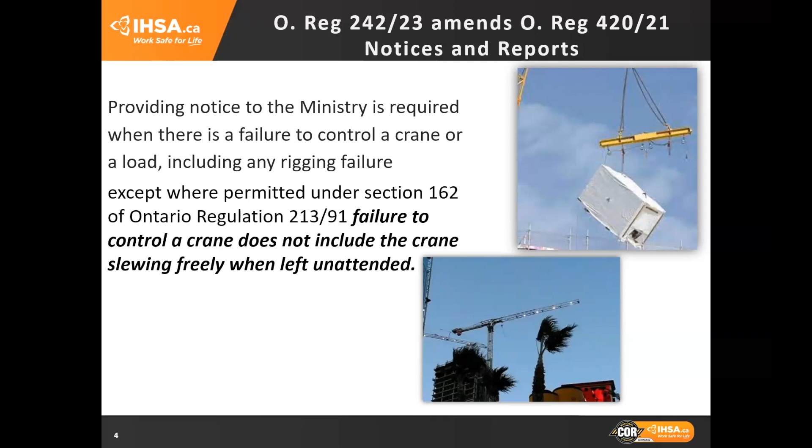Next, we'll cover some of the definitions that have been added to the regulation. A definition is being added for self-erecting tower cranes. Self-erecting tower crane means a tower crane that is capable of being erected without the use of ancillary equipment. Parts of sections 156, 157, and 158 may apply to a self-erecting tower crane, depending on the configuration of the project. These sections will be discussed further in the presentation.

In subsection 1.1, the reference to the regulation for non-destructive testing certification has been updated to allow for rolling reference of the qualifications for the certification standard of the people conducting non-destructive testing.

Section 106 has added 2.1, and it covers signalers and operator interaction. It has been revised to allow communication through other means when using visual signaling cannot be achieved. One example is a blind lift by a crane, where the operator relies on a signaler or a swamper for direction. The signaler can direct the crane operator using a radio or other means of clear, direct communication when the crane operator cannot see the load or the signaler.

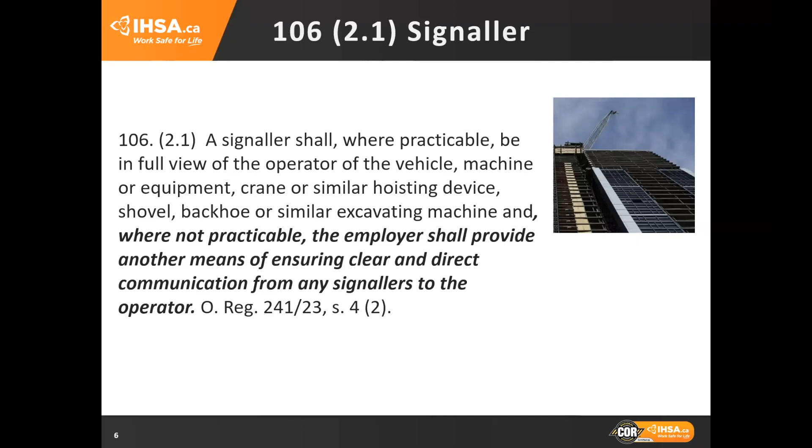Here is a new section that identifies the updated CSA standards referenced in the crane, hoisting, and rigging sections of the regulation. Where the CSA standard Z248-17 is cited, it means CSA standard Z248-17, code for tower cranes. And Z150-16 means the CSA standard Z150-16, safety code for mobile cranes.

And the CSA standard Z150.3-17 means the CSA standard Z150.3-17, safety code on articulating boom cranes.

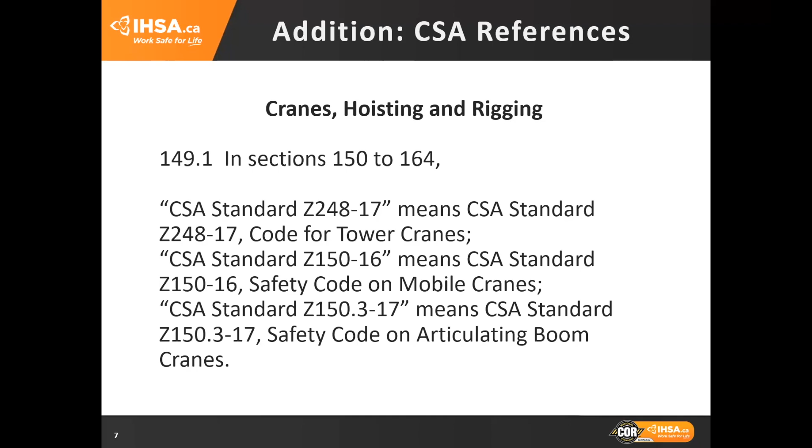Section 150 states the requirements that must be fulfilled to be authorized to operate various hoisting equipment. This section covers the authorization, the training requirements, and the operator requirement for carrying proof of training while operating a crane or other hoisting device.

In clauses A and B of subsection 150 sub 1, the text refers to the operation of mobile cranes. Therefore, the word mobile has been added immediately before cranes or similar hoisting device to provide clarification on the type of crane that requires compliance with the Building Opportunities in the Skilled Trades Act, or BOSTA.

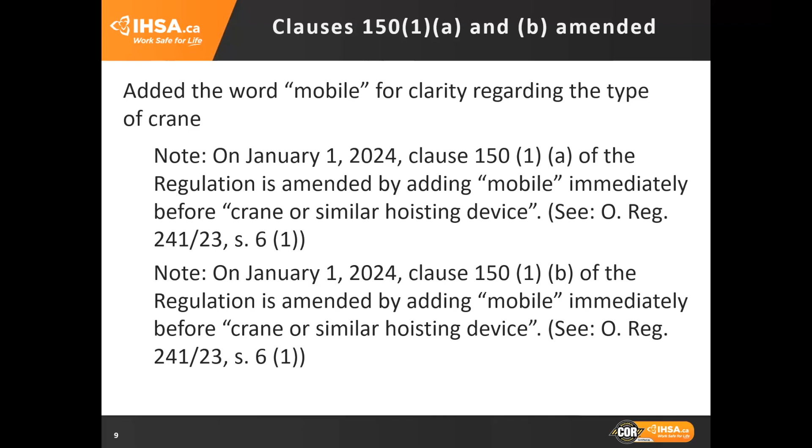Subsection 150 (1.1) has been revoked from the regulation. This requirement for certification does not apply to the operation of excavating equipment. Subsection 150(1) is for the operation of mobile cranes with a capacity over 8 tons and tower cranes.

Excavating equipment may be used to hoist material if the manufacturer allows it. The operators are to comply with subsection 150 sub 2 and sub 3. Excavating equipment used to hoist material is one example of the term other hoisting device.

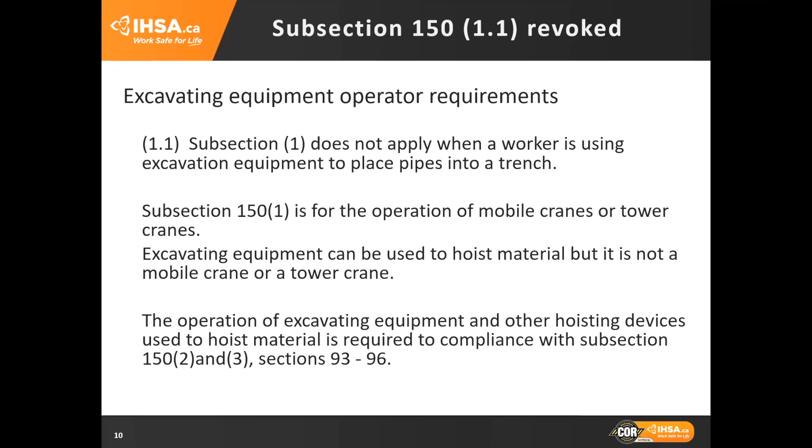The operators of a crane other than the one described in subsection 150 sub 1, such as overhead cranes or gantry cranes and derricks, are to comply with subsection 150 sub 2 for the operation. Same goes for other hoisting devices. Operators of other hoisting devices are also to comply with subsection 150 sub 2.

So no worker shall operate a crane or other hoisting device other than the ones described in subsection 1 unless the worker has been trained in the safe operation of the crane or other hoisting device, or a worker is being instructed in the operation of the crane or other hoisting device and is accompanied by a person who meets the requirements of clause A.

The requirement for written proof of training has been removed from subsection 150 sub 2 and added to subsection 150 sub 3.

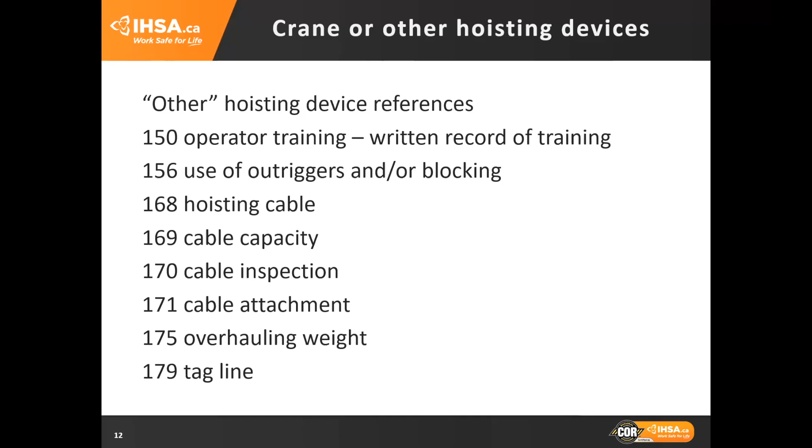The term other hoisting device has been added to the regulation in various sections. This is to cover other equipment that is capable of hoisting material, such as excavators and lift trucks. We will go through the sections as they apply when we get to them in the presentation.

So here's a before and after when it comes to subsection 150 sub 2. The word similar has been changed to other in the newest version.

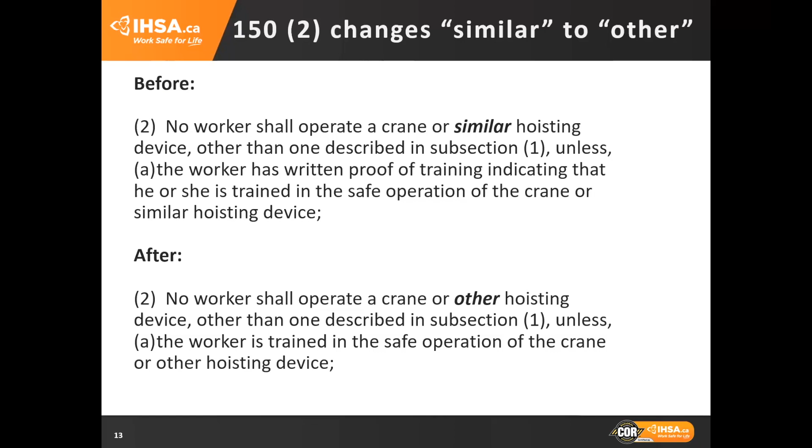In subsection 150 sub 3, his or her changes to workers. Subsection 3 applies to both subsection 1 and 2. A worker shall carry the worker's written proof of training while operating a crane or other hoisting device.

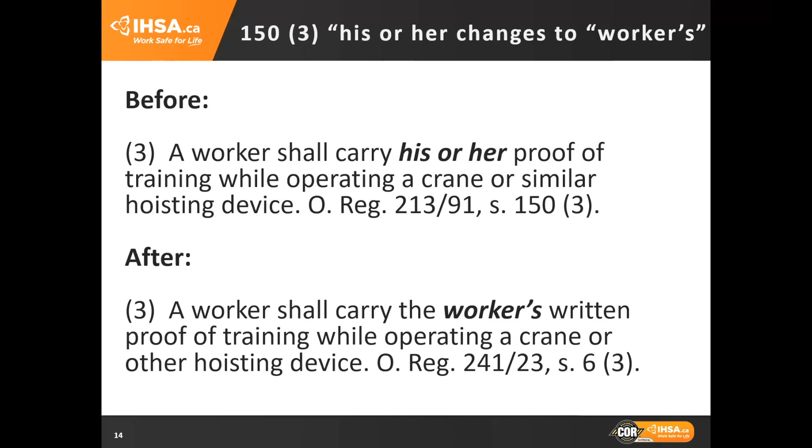Subjecting a crane to a load greater than its rated load carrying capacity was prohibited even if it was required by the manufacturer for testing. Now, load tests required by the manufacturer are allowed to be conducted. The words other than during load tests required by a manufacturer has been added to subsection 151.

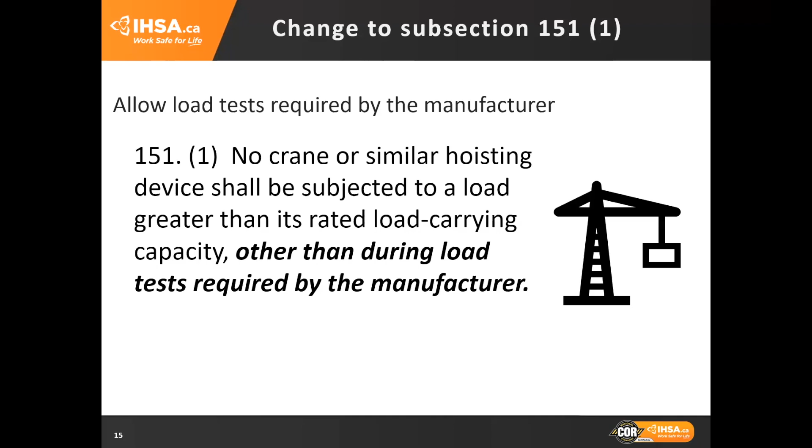The CSA standard referenced in 151 sub 2 are updated for determining the crane's load carrying capacity. Subsection 151 sub 2 requires the manufacturer of a crane or an engineer to determine the rated load carrying capacity of a crane in accordance with, for mobile cranes, the CSA standard Z150-16, safety code for mobile cranes.

Or CSA standard Z150.3-17, safety code for articulating boom cranes. And for tower cranes, it's CSA standard Z248-17, code for tower cranes.

Previously, this section stated that every crane or similar hoisting device shall have affixed to it a load rating plate. This requirement was not practical for cranes with dozens of possible configurations. So 151 sub 3 was amended to reference load rating charts or charts and not just a plate.

The operator must be able to read the load rating charts while at the controls of the crane to determine the maximum load that can be lifted for each configuration.

To achieve this, subsection 151 sub 3 requires every crane to have affixed to it the load rating chart or a plate with the model and serial number or other traceable method that can be used in conjunction with the crane-specific load charts that the operator can read while at the controls of the crane while it's in use.

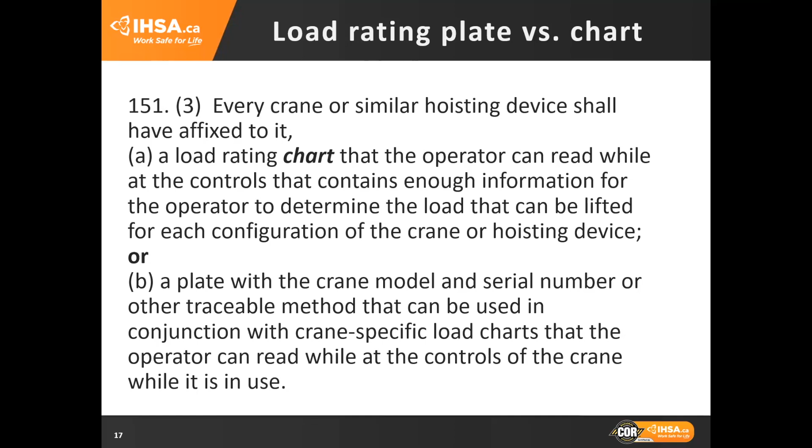Here are some examples. On the top right, it's a load chart affixed to a boom truck. In the lower left, you'll see an example of an identification plate, and beside that would be a binder matching the identification plate for the crane.

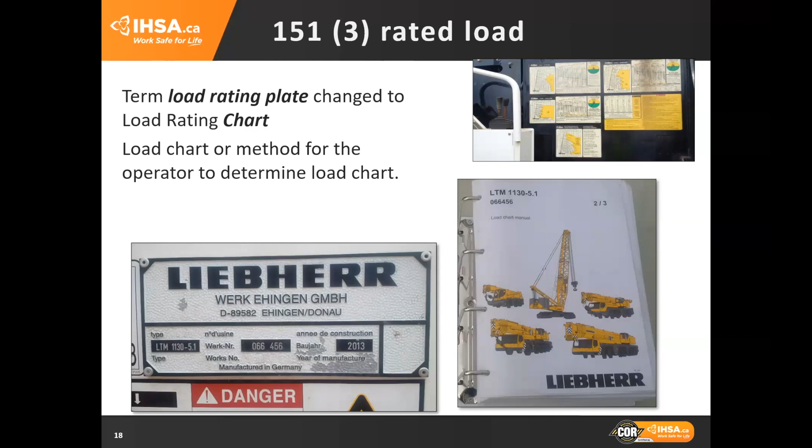This is new for luffing cranes. As of January 1st, 2025, a luffing boom tower crane will be required to have a boom angle indicator that the operator can read while at the controls.

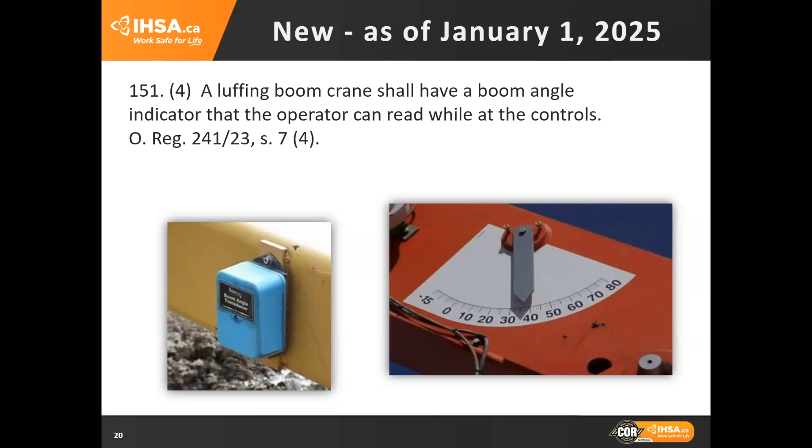Section 152 covers crane logs. You can get them at IHSA.

Here are the changes to 152 sub 1. Basically, the term permanent record is now called owner's crane log, and the rest of this section remains the same. The requirement to keep records of all inspections, tests, repairs, modifications, and maintenance of the crane or similar hoist device remains the same. Just the term permanent record is now called owner's crane log.

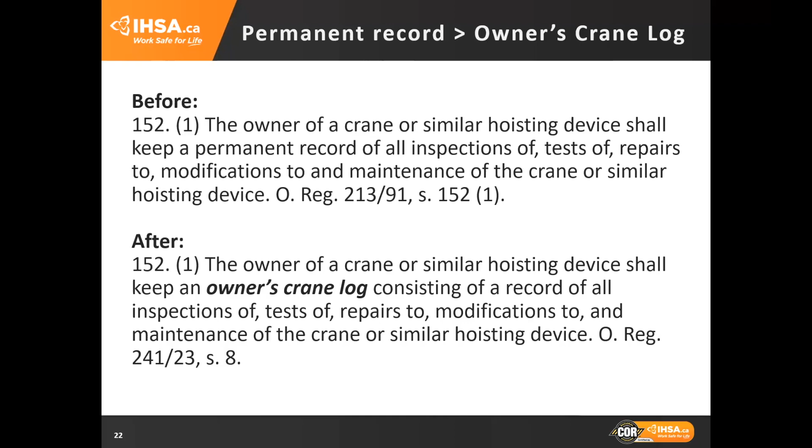This is a new requirement: if there are no records or insufficient records required in subsection 1, a crane owner's log consisting of all records of inspections, tests, repairs, modifications, and maintenance of the crane must be started. If that's not available, an annual inspection must be completed prior to the crane being put into service at the project. Once the annual inspection is done, this is considered the starting point for the owner's crane log. For example, if the crane was bought secondhand or at an auction and there are no maintenance records, an annual inspection would have to be conducted.

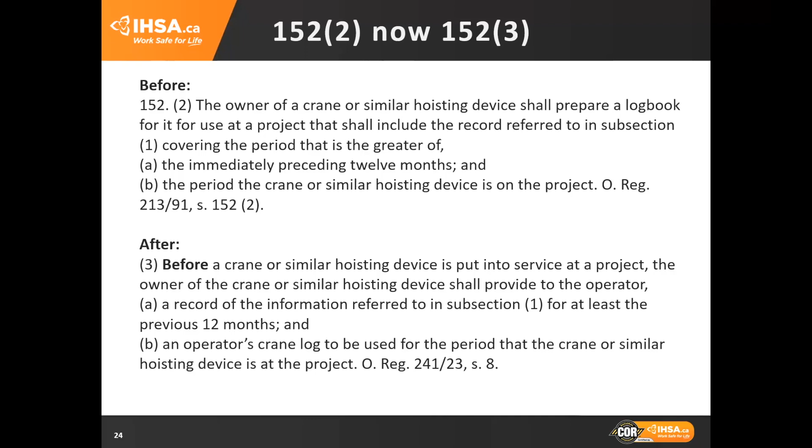The difference between subsection 152 sub 2 and 152 sub 3 is basically the numbering. It's the same requirements. The only change is that the owner must provide the operator with the crane log prior to the crane being used at the project, so the operator needs to have the crane log before using the crane.

152 sub 4 has been updated. The logbook is to be kept up to date with a record of all inspections, tests, repairs, modifications, and maintenance of the crane while it's at the project. So it must be kept up to date as the crane is being used.

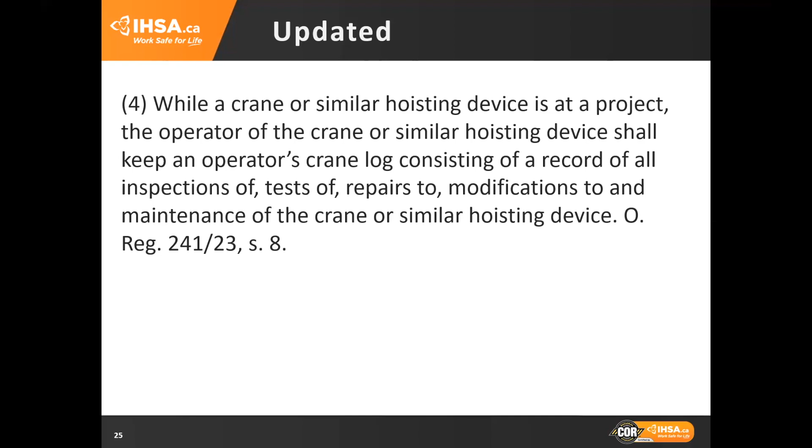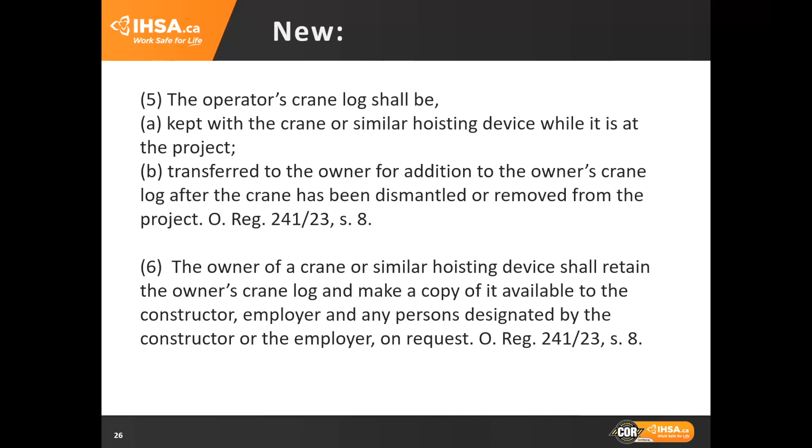It's another new requirement. Subsections 5 and 6 are both new. The owner is to add the information to the owner's crane log after the crane has been dismantled or removed from the project. The owner of a crane or similar hoisting device shall retain the owner's crane log and make a copy available to the constructor, employer, and any person designated by the constructor or employer upon request.

Personnel lifting. The amendments mirror the requirements of attachment methods described in CSA Standard Z150 for mobile cranes. The wording makes it clear that this section includes work platforms that are pinned to the boom.

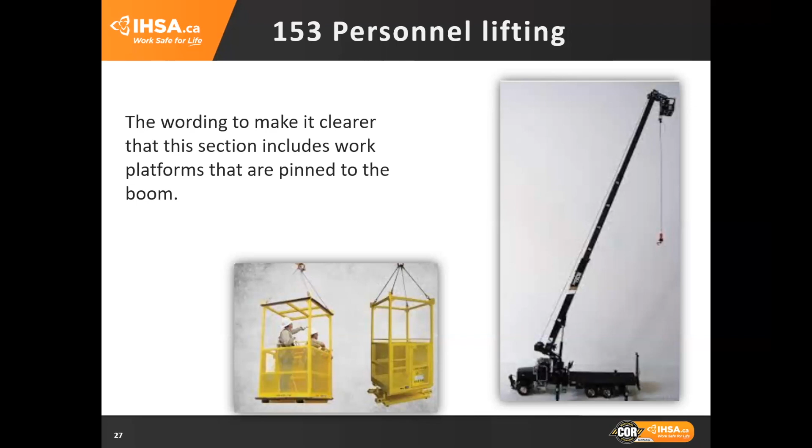This is an example of a pinned platform. Clause 153 2B III clarifies the secondary means of support for a suspended platform. A crane may be used to raise, support, or lower a worker only if the platform the worker is on is equipped with a secondary means of suspension or support that is secured above the hook and does not impede the hoist line. The example here is also from Z150 of the CSA standard.

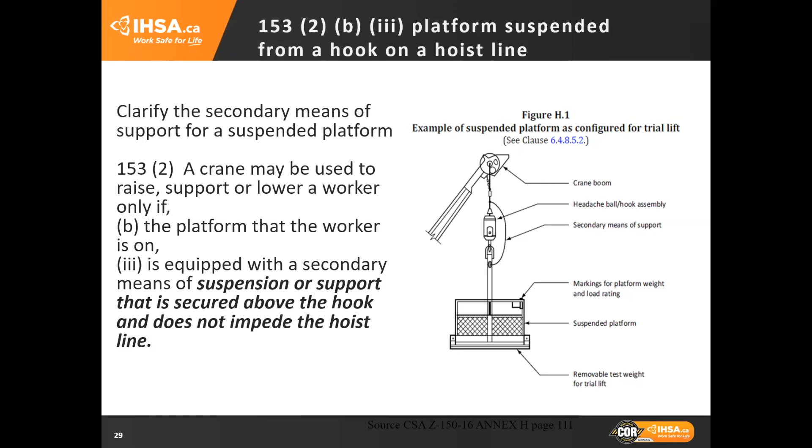Words have been added here to clarify the availability of the load chart to a worker at the controls, or otherwise available to an operator at the controls of the crane while it's in use, similar to the requirements in section 151 for a load chart or rating chart.

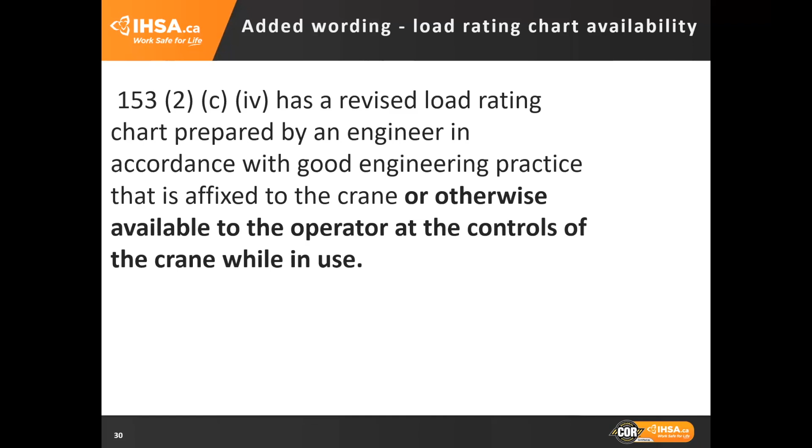Subsection 153 sub 9 has been amended by removing the word visually. A competent worker shall inspect a crane and rigging, not limited to the visual only. Other inspection instructions may apply depending on the application.

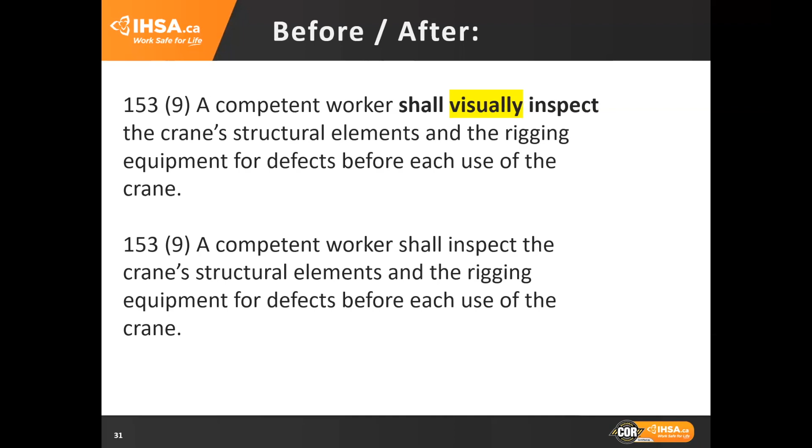153.11 has been modified by removing the requirement to only call by telephone. This allows for other methods of notification.

In subsection 154 sub 1, the terms climbed and erected have been added. The term climbing or climbed is as defined: climbing is a process whereby an entire crane is raised on or within a structure that is under construction as the height of the structure increases. So section 154 requires a crane or similar hoisting device to be set up, assembled, climbed, erected, extended, and dismantled only by a competent worker.

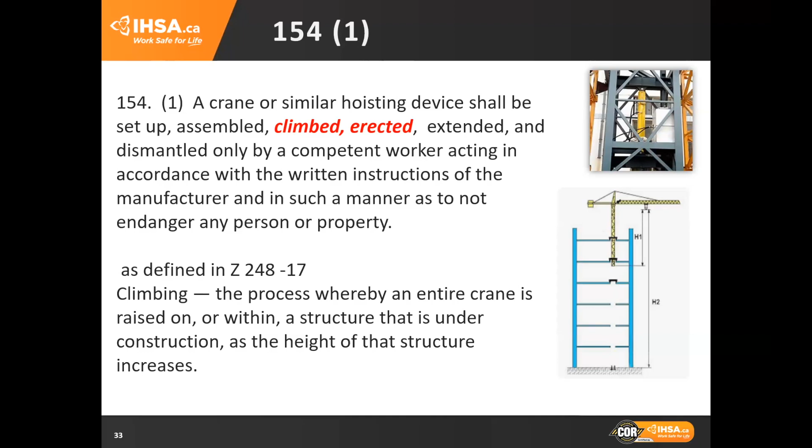There's a new subsection added to 154. This requires every portable or removable counterweight, test block, and ballast used on a crane to be accurately weighed and have their weight clearly marked on them.

There's a new clause for 156. An outrigger or stabilizing device used on a crane or other hoisting device shall be set up only after the ground-bearing pressure has been considered by the operator. This is to ensure that the crane is set up on ground that can support the crane and the maximum load it can carry during load handling activities. The manufacturer's operating instructions and specifications for the crane should provide information about the pressures exerted by the crane. Previously excavated soil and other voids may affect the stability of a crane.

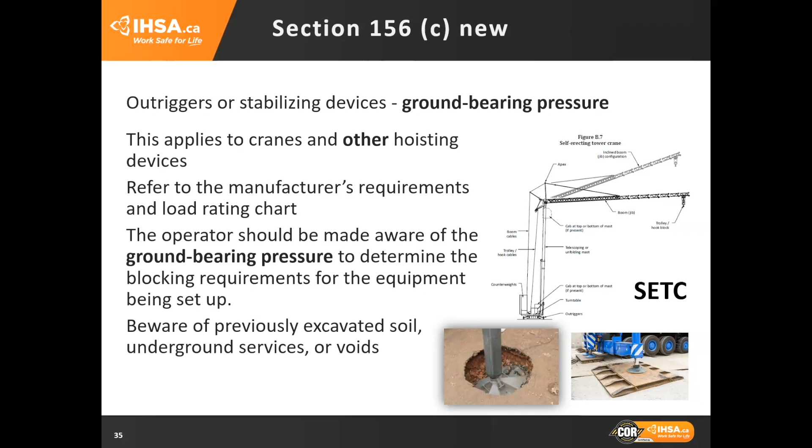Turn it over to you, Saeed, for the next part of the engineering presentation.

Yes, so section 157 spells out the requirement for installation and design requirement and report. This section talks about proper bearing capacity and reshoring and bracing requirement for the tower crane and all the required paperwork.

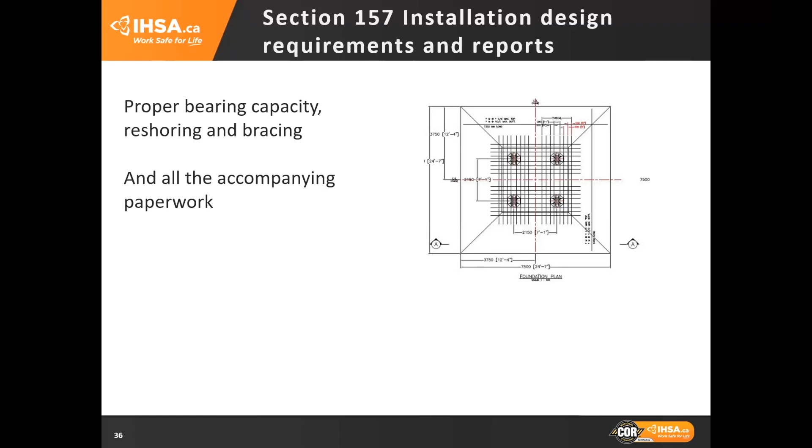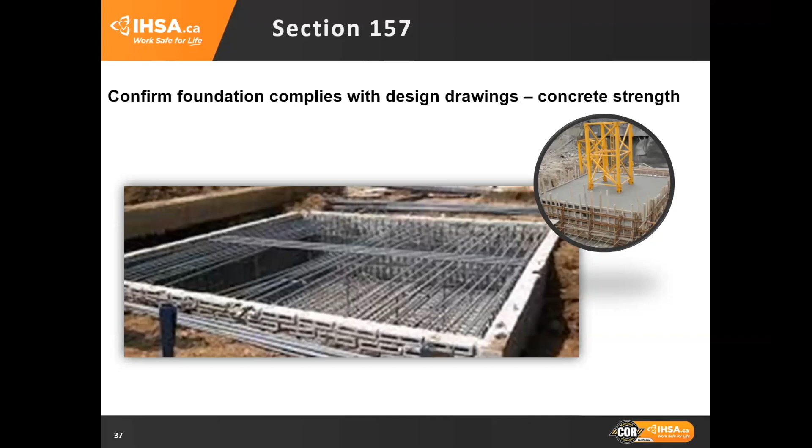So basically the engineer's role is to confirm the bearing capacity meets the design requirement of the foundation, and also ensures that the rebar arrangement numbers and sizes are within the design criteria. And after the concrete is poured, ensure the concrete strength meets the required design.

So a tower crane, other than a tower crane mounted on a traveling base using a traveling undercarriage or a self-erecting tower crane that does not require foundation, shall be erected at a project in accordance with this section.

As I said previously, the foundation, shoring and bracing that supports the tower crane or ties shall be designed by an engineer, and constructed, installed and dismantled in accordance with the design drawing.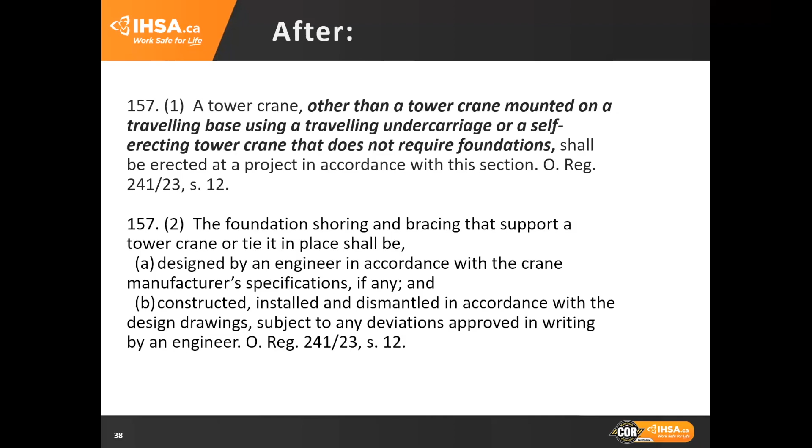The engineer who prepares the foundation design drawing shall consider the ground bearing pressure and capacity in preparation of the design, and where a building or structure is supporting a tower crane and the tower crane is attached to a structure, the engineer of record or another engineer should review the forces exerted by the tower crane on the building and ensure that the structural integrity of the building or structure is maintained.

So an engineer shall sign the design drawing for the foundation, shoring and bracing after they approved it, and the constructor shall keep all that paperwork and stamped drawings at the project for shoring, bracing, and foundation.

Also, an engineer shall inspect the foundation supporting the tower crane before the concrete is poured and prepare a written report confirming the foundation and support surface complies with the foundation design drawing, subject to any deviation from the design being approved in writing.

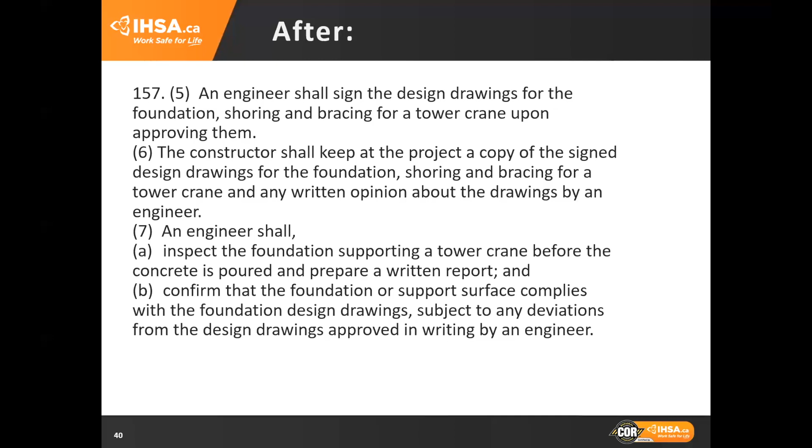The written report shall be kept at the project, and the crane shall not be erected until the concrete foundation reaches the strength specified by design. The shoring and bracing that supports the tower crane must be inspected by an engineer after shoring and bracing or ties have been installed and before the crane is put into service for the first time.

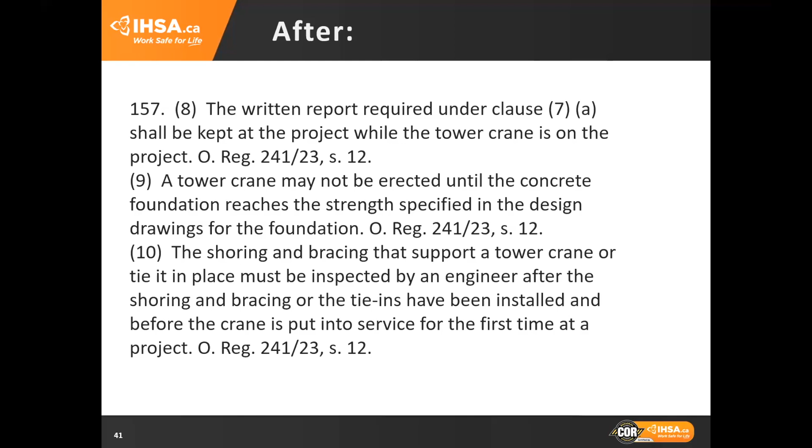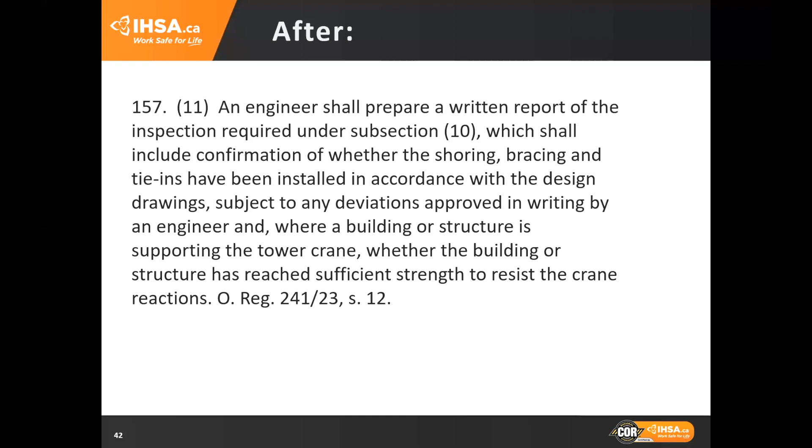So an engineer shall prepare a written report of the inspection required under subsection 10, including confirmation that the shoring and bracing and ties have been installed in accordance with the design drawing, and where a building structure is supporting the tower crane, whether the building or structure has reached sufficient strength to resist the crane reactions.

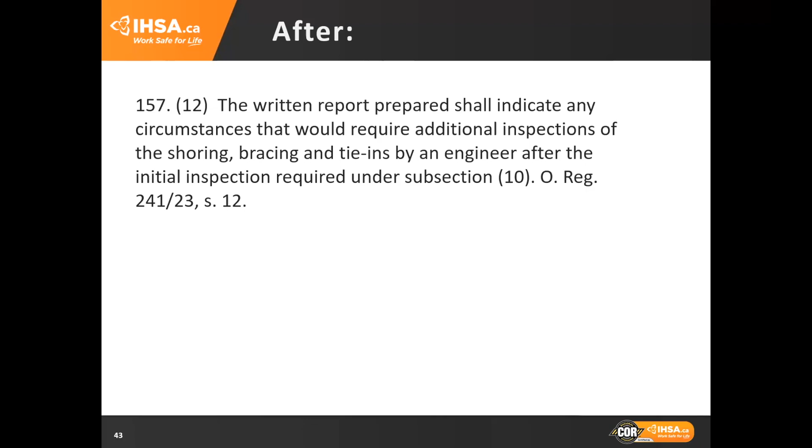The written report prepared shall indicate any circumstances that would require additional inspection of shoring, bracing, and tie-ins by an engineer after the initial inspection. So after the initial inspection required under subsection 10, the shoring and bracing components and tie-ins installed for climbing operation shall be inspected by a competent person, unless otherwise specified by the engineer in the written report, before and after each climbing operation to ensure the shoring and bracing components and tie-ins are installed in accordance with the design drawing.

And weekly after each climbing operation, to ensure that all installed shoring and bracing and ties are in place.

Each major component used for shoring the tower crane shall be clearly marked, stating that the component shall not be removed or repositioned unless authorized by an engineer.

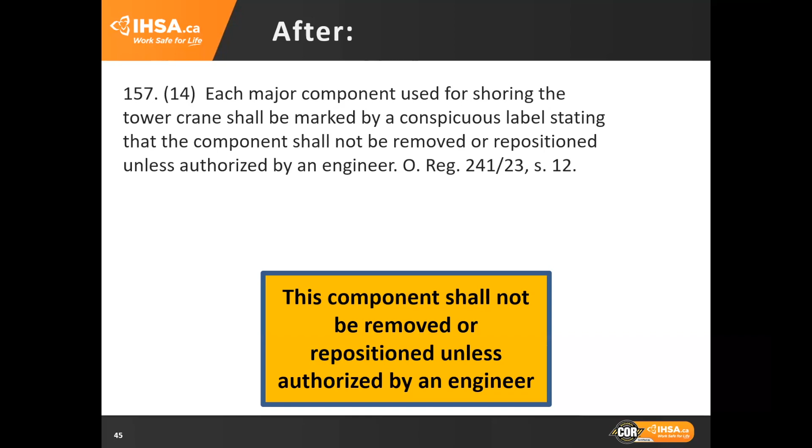Here's a sample of a label that could be used at the project to mark the components that need to be maintained in place unless authorized by an engineer.

These are three new requirements, section 157.1, 2, and 3, that talk about the requirement for the crane being installed in a plumb condition, and also requirements from CSA Z248, clauses 5.1, 5.8, and 5.9, and also the new requirement for the design that comes into effect in 2025.

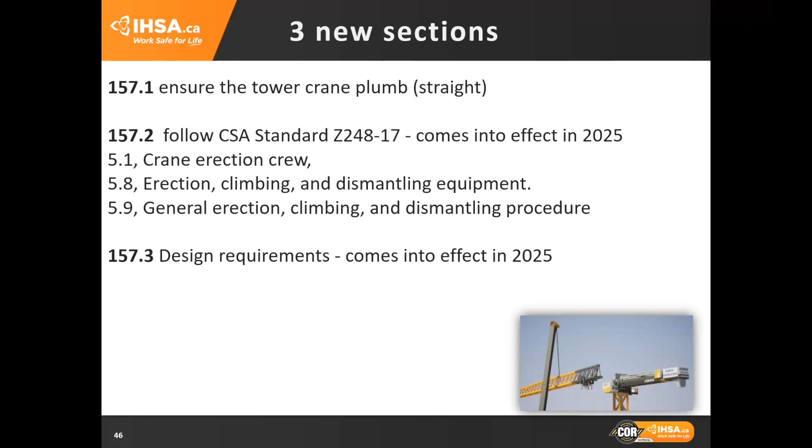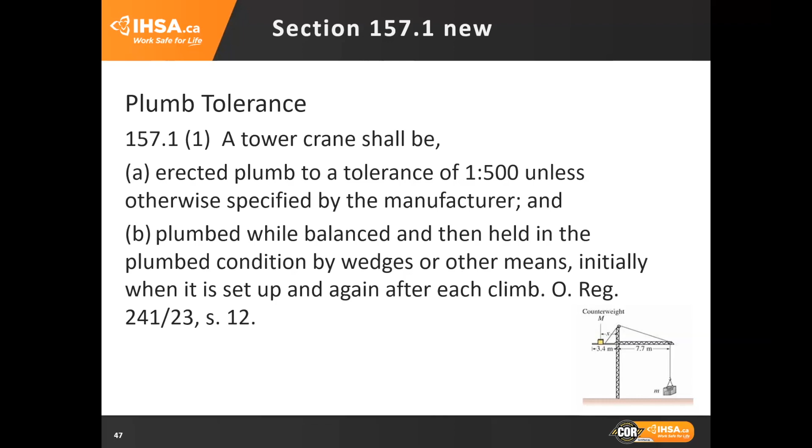So the plumb tolerance required by regulation is 1 to 500, which basically means in 500 vertical, only 1 horizontal. The tower crane should be installed in a straight and plumb condition and kept that way during operation.

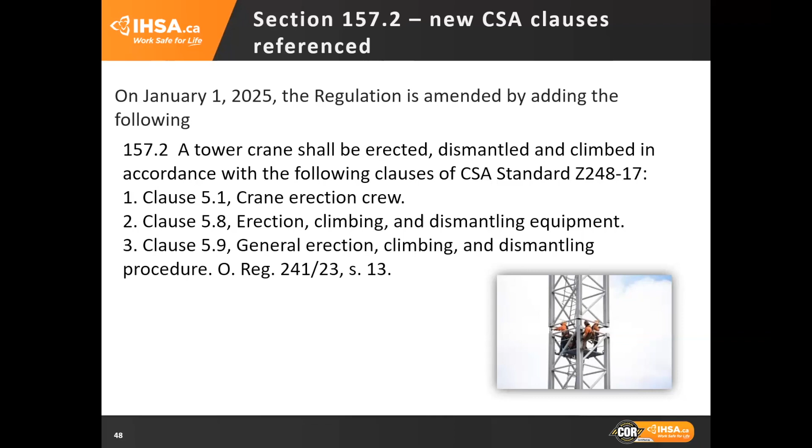On January 2025, the following will be added to the regulation. A tower crane shall be erected, dismantled, and climbed in accordance with the following clauses of CSA Z248-17: clause 5.1 talks about crane erection crew, clause 5.8 covers erection, climbing, and dismantling equipment.

And clause 5.9, general erection, climbing, and dismantling procedure. The new design requirement will kick in January 2025, and basically requires any crane manufactured on or after that date to be in compliance with clause 4.1 to 4.25 of CSA Z248-17 or European Standard EN 14439 2006 plus A2 2009. In addition, they should comply with the Electrical Safety Authority Specification 009 R0, electrical safety for tower cranes.

The control systems shall be in compliance with clause 4.21 of CSA Z248-17. If a tower crane manufactured before that date does not meet these standards or equivalent, the standard that those tower cranes are designed to should be reviewed by an engineer, and that engineer should determine whether or not that crane is in compliance with the standards listed in the table.

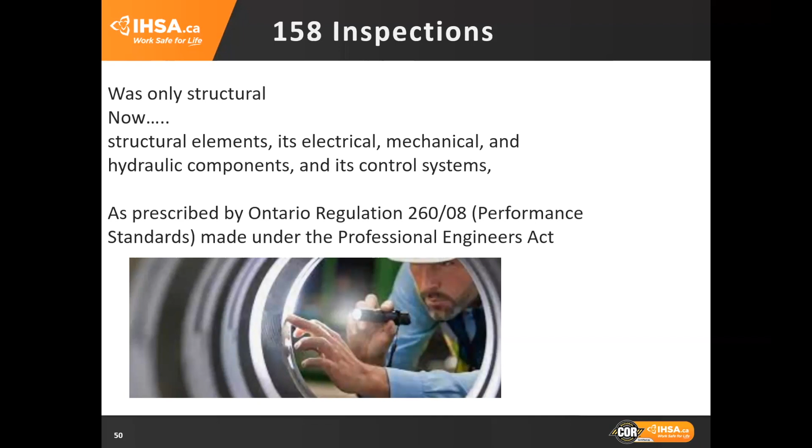Inspection for the tower crane used to be only for structural components. Now the regulation requires, in addition to structural components, its electrical, mechanical, and hydraulic components and control system to be inspected as per Ontario Regulation 260-08, which is the performance standard made under the Professional Engineers Act. This section spells out the requirement for the inspection to be done, and I'll talk about them.

Can you go to next slide?

Section 158.1 requires an engineer to ensure that a tower crane's structural elements, electrical, mechanical, and hydraulic components, and its control system are inspected in accordance with the performance standard under the PO, and that any defects identified are addressed, at the following times.

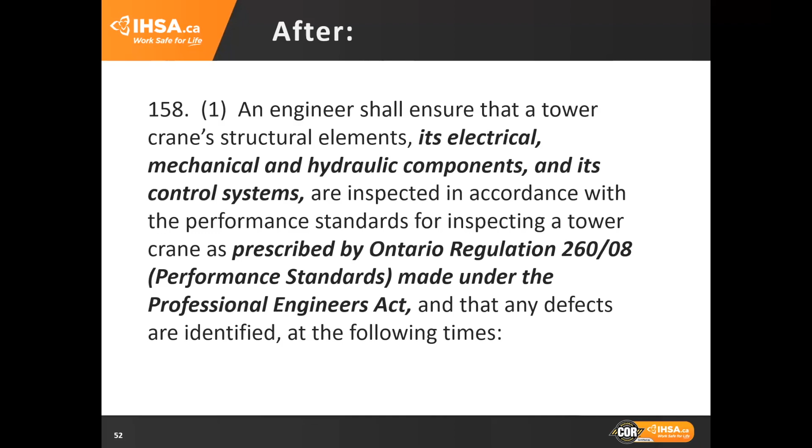For a tower crane, other than a self-erecting tower crane, the inspection should be conducted before the tower crane is erected at the project, another inspection after the tower crane is erected and before it's being used, and thereafter every 12 months or as often as recommended by the crane manufacturer, whichever is more frequent, while the crane is erected.

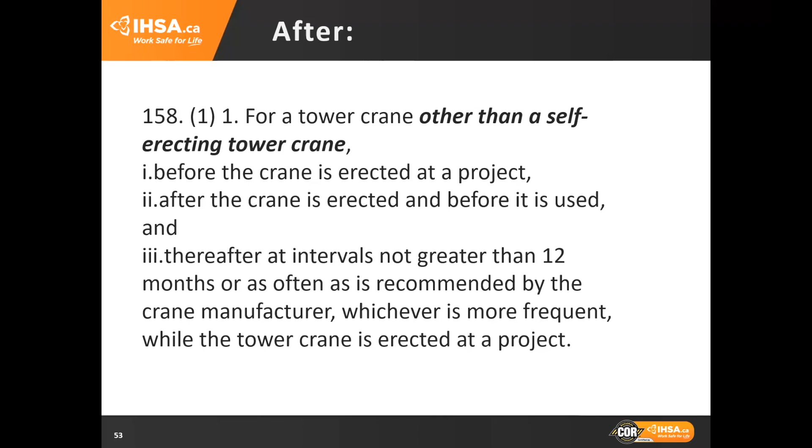For a self-erecting tower crane, the inspection shall be conducted before the tower crane is put into service for the first time, and thereafter at intervals not greater than 12 months while the crane is in use at the project, or every 12 erections of the crane, or as often as recommended by the crane manufacturer, whichever occurs first.

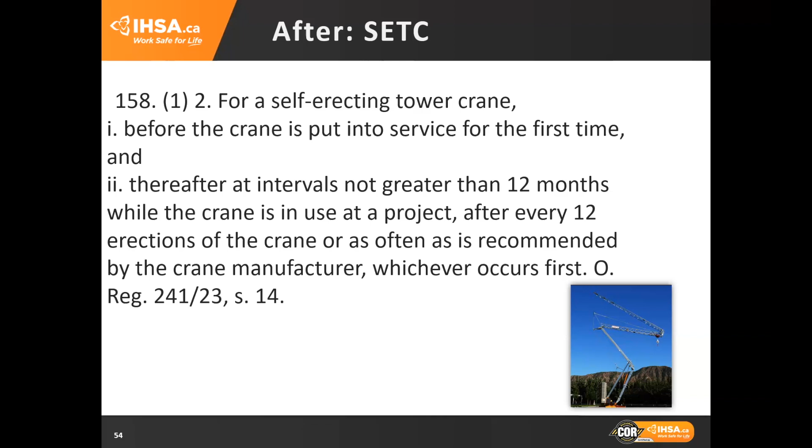The inspection of the structural components must include non-destructive testing to ensure the structural integrity of the crane is maintained. This inspection is required by the regulation to be conducted before the crane is erected, unless an engineer decides that while the crane is erected, non-destructive testing is required, in which case they should do that.

Section 158.3 basically requires a better and enhanced report as prescribed by Ontario Regulation 260 performance standards under PO. The engineer conducting the inspection, or under whose direction an inspection is done, shall prepare a written report of the inspection and test results in accordance with the performance standards for the inspection of a tower crane as prescribed by Ontario Regulation 260-08, including confirmation that all components are in adequate condition.

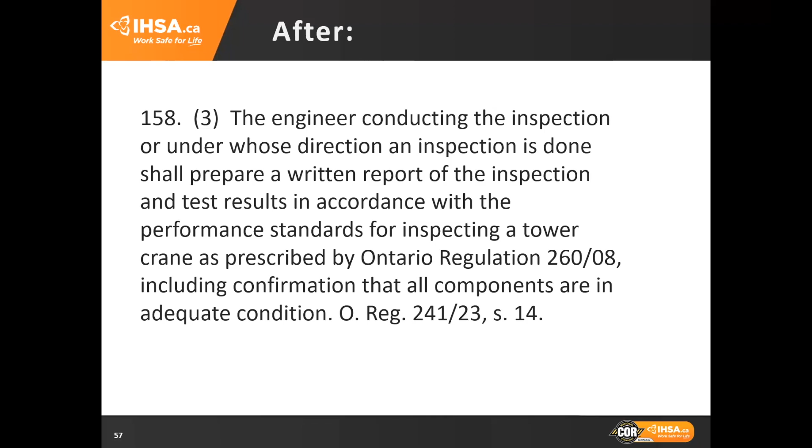A tower crane shall not be used until any defects identified in the inspection have been corrected or repaired in accordance with the instructions of the tower crane manufacturer or an engineer. A tower crane shall not be used until it has been inspected by an engineer, and the engineer has prepared a written report of the correction, repairs, and result of the inspection, confirming that any defects identified have been corrected or repaired and that the corrected or repaired components are in adequate condition.

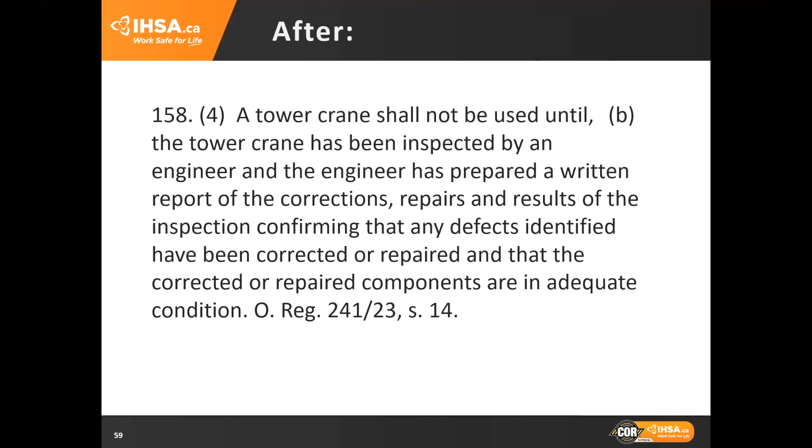So basically the report shall include items that have been inspected, the issues that have been rectified, and confirmation that the crane is safe for use.

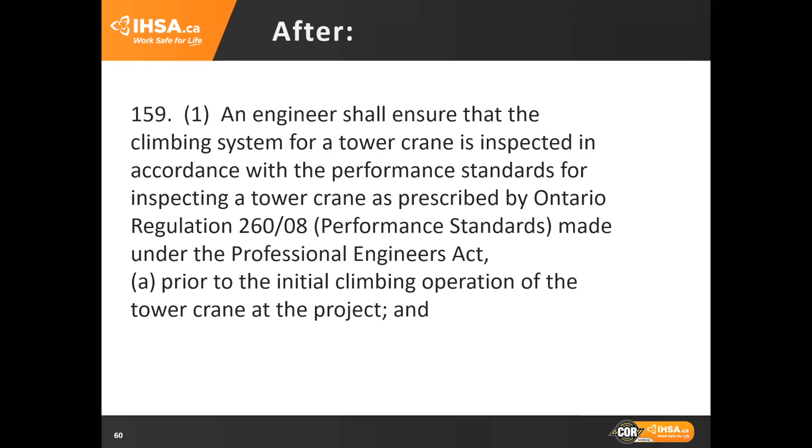An engineer shall ensure that the climbing system for a tower crane is inspected in accordance with the performance standards for inspection of a tower crane as prescribed under the PO, prior to the initial climbing operation of the tower crane at the project, and thereafter at intervals not greater than 12 months while the tower crane is erected at the project. The engineer conducting the inspection, or under whose direction an inspection is done, shall prepare a written report of the inspection in accordance with the performance standard for inspecting a tower crane as prescribed by performance standard under PO, and should include confirmation that the components are adequate.

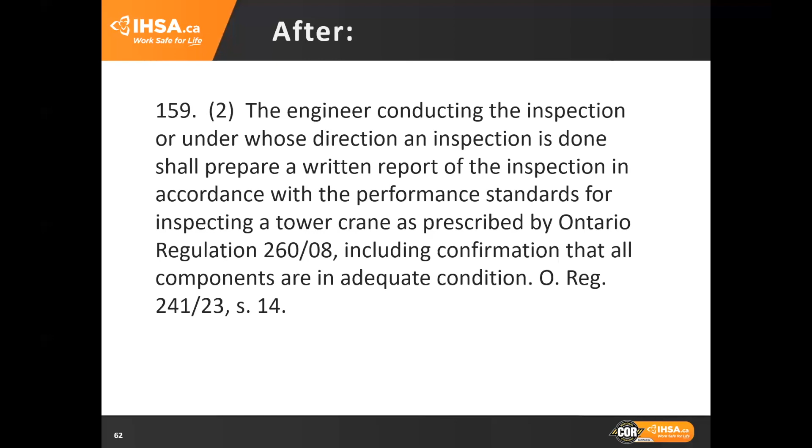Section 159.1, which will be kicking in January 1st, 2025, is a new requirement for a comprehensive 10-year inspection.

Regulation requires the tower cranes to be thoroughly inspected 10 years after they have been manufactured, and after that every 10 years. So basically at year 10, 20, 30, and so on, if the tower crane is in use after that.

An engineer shall ensure that the tower crane's structural elements, its electrical, mechanical, and hydraulic components, and its control system that may affect the structural integrity, stability, or motion of the tower crane or its load are inspected according with subsection 2 before a tower crane is erected at the project if 10 years have elapsed since the time the tower crane was manufactured, and thereafter at least once every 10 years after the date of the last inspection under this section before the tower crane is erected at the project.

The inspection required under subsection 1 shall include inspection of the structural components, including visual inspection of all welds and non-destructive testing of a sampling of welds determined by an engineer, and measurement of the consistency of wall thickness within the closed section of the structural components to confirm the sections are compliant with the original design requirement.

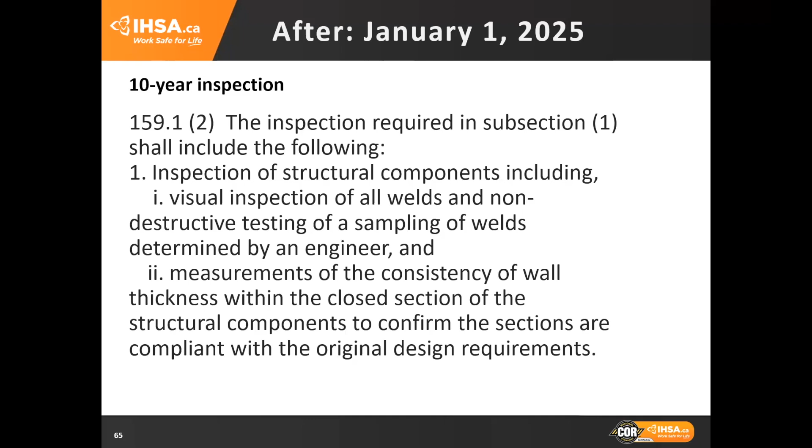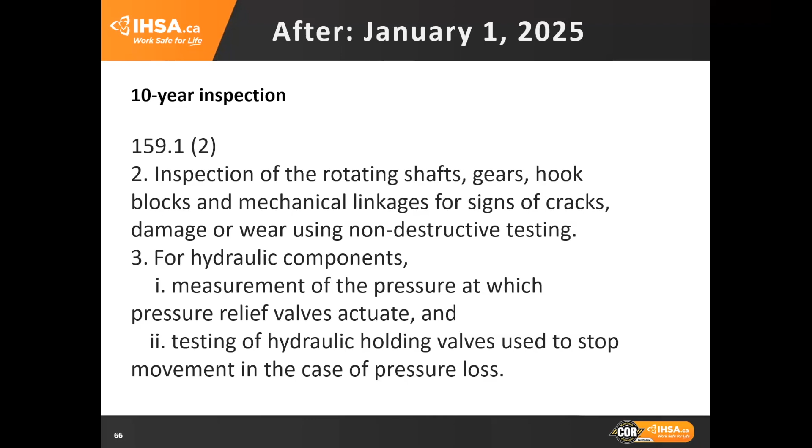Inspection of rotating shafts, gears, hook blocks, mechanical linkages, for signs of cracks, damage, or wear using non-destructive testing. For hydraulic components, measurement of the pressure at which pressure relief valves actuate, and testing of hydraulic holding valves used to stop movement in the case of pressure loss.

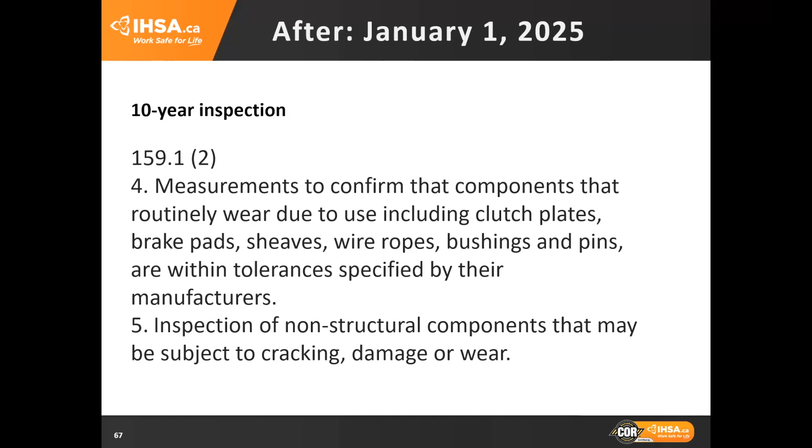Measurement to confirm that components that routinely wear due to use, including clutch plates, brake pads, sheaves, wire ropes, bushings, and pins, are within tolerance specified by their manufacturer. Inspection of non-structural components that may be subject to cracking, damage, or wear.

Performance of operational tests on the components listed below in accordance with the manufacturer's instruction to confirm that the components are in adequate condition and operating in accordance with the manufacturer's specification. Components include brakes, slew rings, hydraulic motors, hydraulic pumps, valve blocks, hoist and luff drums, gearbox, and drive shafts.

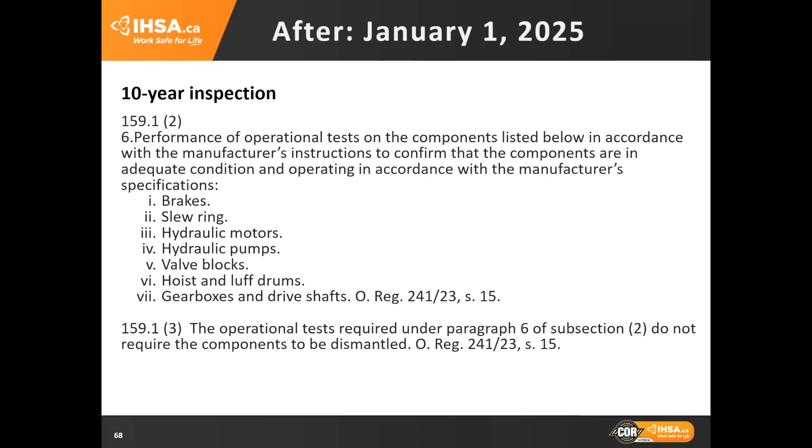The operation tests required under paragraph 6 of subsection 2 do not require the components to be dismantled. The other inspections might require dismantling of the components.

The engineer conducting the inspection, or under whose direction an inspection is done, shall prepare a written report of the inspection, including test results, observations, measurements, and records.

Any defects identified in the inspection that may affect the structural integrity, non-structural components, the stability or motion of the tower crane or its load shall be corrected or repaired in accordance with the instruction of the tower crane or component manufacturer or an engineer.

An engineer shall confirm in a written report that any defects identified have been corrected, repaired, and that the corrected or repaired components are in adequate condition.

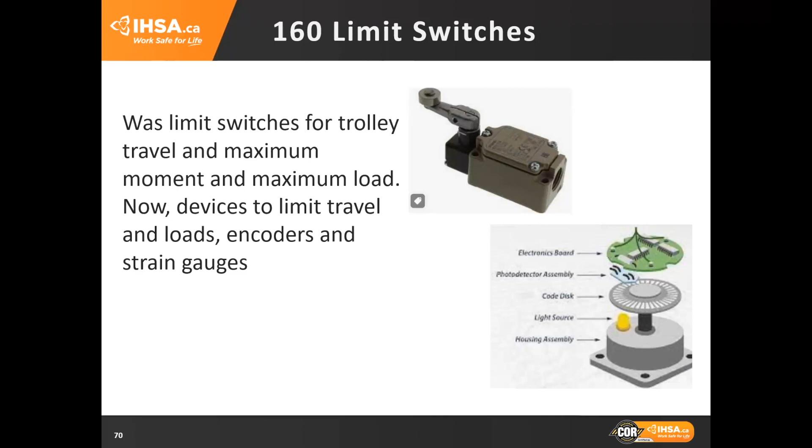Section 160 talks about limit switches. In the past, there were only limit switches for trolley, travel, and maximum moment and load. Now other limit switches are required: devices to limit travel, loads, encoders, and strain gauges.

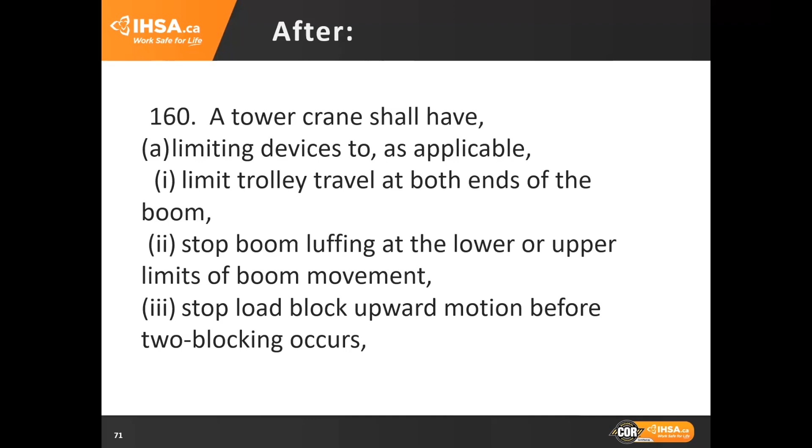A tower crane shall have limiting devices to, as applicable, limit trolley travel at both ends of the boom, stop boom luffing at the lower or upper limits of boom movement, stop load block upward motion before two-blocking occurs.

A tower crane shall have limiting devices to, as applicable, limit crane travel at both ends of the runway tracks, limit maximum load lifted in each gear ratio, and prevent overloading the crane by limiting the lifted load in accordance with the operating radius.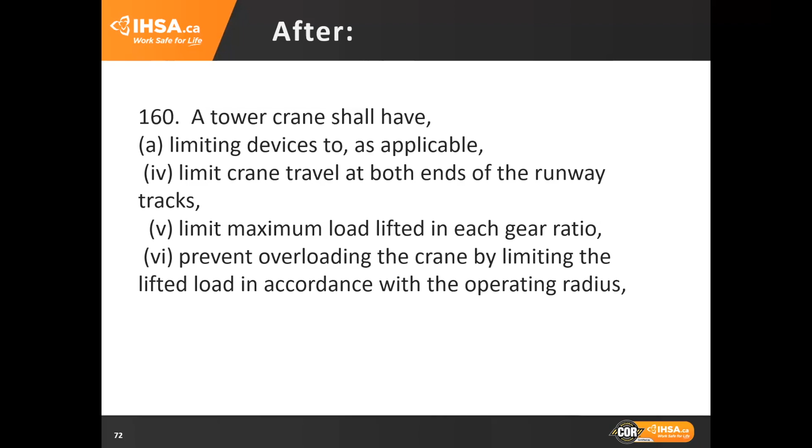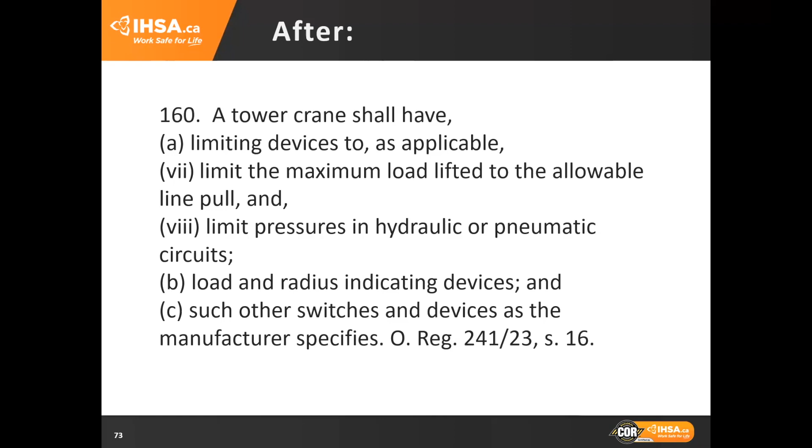The tower crane shall have limiting devices to, as applicable, limit the maximum load lifted to the allowable line pull and limit pressure in hydraulic or pneumatic circuits, load and radius indicating devices, and such other devices, switches, and devices as the manufacturer specifies.

Now, thanks, I can, Saeed, turn it back to Guy.

Thanks, Saeed. Under 161, a competent worker shall perform operational tests on the tower crane to ensure that its limiting and indicating devices are installed and functioning in accordance with manufacturer's specifications or an engineer's instructions.

All clearances and alignments are adequate. Gearing and all other moving parts are operating correctly. Controller switches and other control devices are operating correctly. All limit switches are operating correctly.

All circuits, interlocks, and sequences of operation are operating in accordance with the manufacturer's specifications, and all protective devices are operating correctly. The audio device near the base of a traveling crane is operating correctly, and each motion of the crane operates in accordance with the manufacturer's specifications.

The new section 161.1 requires daily, weekly, and monthly inspections to be conducted in accordance with section 161. While a tower crane is used at a project, its components shall be inspected by a competent worker in accordance with the manufacturer's instructions, but at a minimum, the following inspections shall be done.

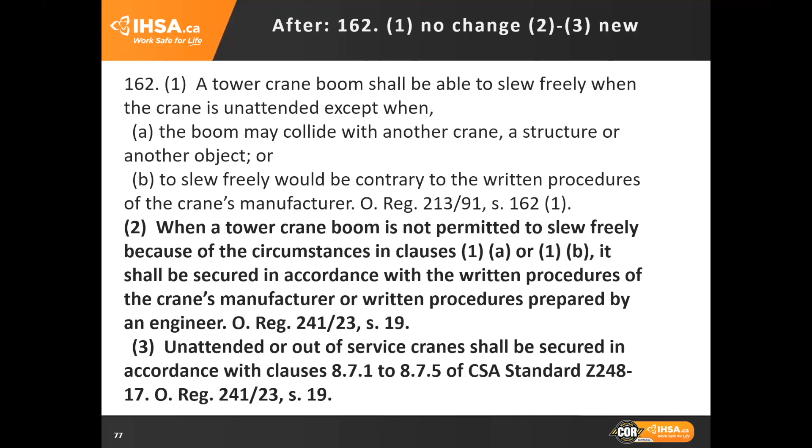162.1 is another new section added to the regulation for anti-collision devices. This will come into force on January 1st, 2025. It'll address multiple cranes at a project and anti-collision devices. Where there's multiple cranes at a project, the hoisting operation shall meet the clearance requirements set out in clause 8.10 of CSA standard Z248-17.

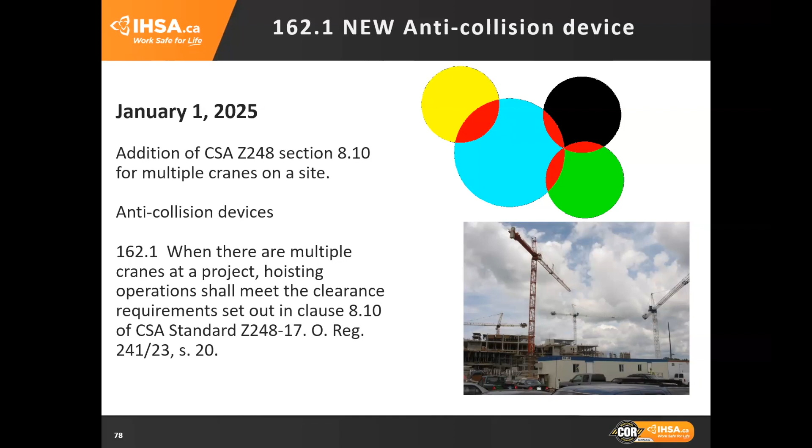Subject to section 164 has been added to the beginning of section 102. This amendment will allow the suspended load to be left on a hook of a crane without the operator at the controls. It's to balance the crane where there isn't room for a crane to slew or rotate with the wind and when it's left unattended.

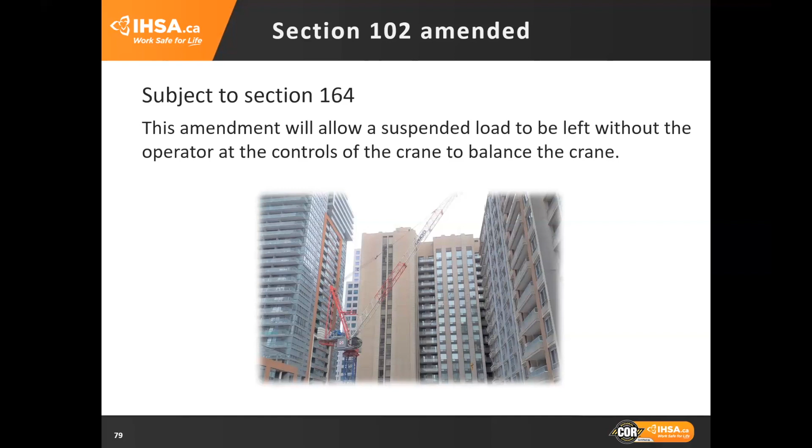Section 164 requires a load block of an unattended tower crane to be left empty at the top position and located at the minimum radius specified by the manufacturer or approved by an engineer. The only exception to this requirement is that if the crane manufacturer specifies or an engineer approves that a weight needs to be left secured to the load block of an unattended tower crane to balance the crane if it cannot slew freely.

This allows a load to be secured to the load block of the tower crane to relieve the stresses by balancing the crane if it cannot slew freely due to obstructions such as another structure or a crane at the project. Unattended or out of service cranes must also be secured in accordance with clause 8.7.1 to 8.7.5 of CSA standard Z248-17, the Tower Crane Code.

As of January 1st, 2025, section 162.1 requires tower cranes to meet the clearance requirements in 8.10. This clause addresses operating zones for overlapping tower cranes and the use of anti-collision devices, operating procedures, and communication requirements.

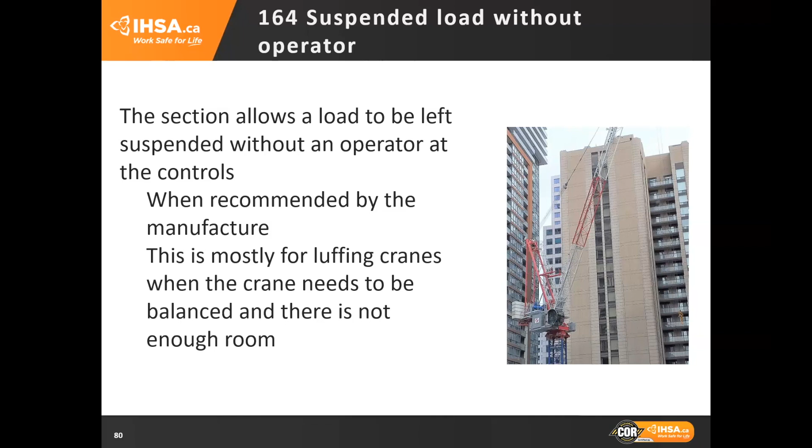Prior to that, this is what section 164 said: Unless otherwise specified by the manufacturer or approved by an engineer, a weight needs to be secured to the load block of an unattended crane to balance the crane that cannot slew freely. The load block of an unattended crane should be left empty at the top position and located at the minimum radius specified by the manufacturer or approved by an engineer.

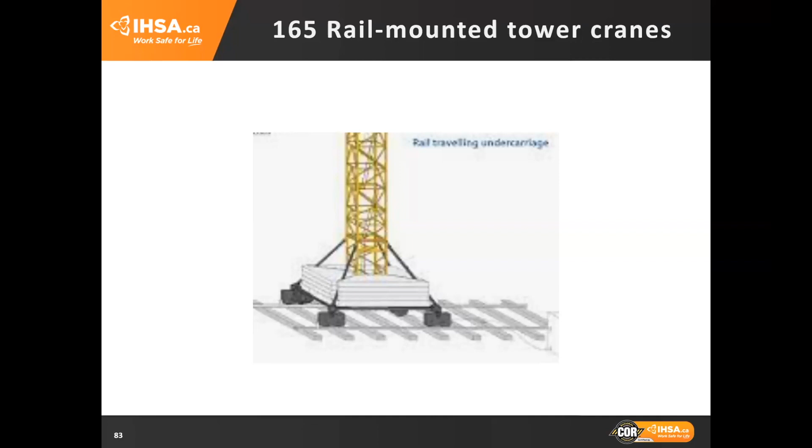Section 165.1, the track foundation and track, including rails and ties, of a tower crane mounted on a traveling base using a traveling undercarriage, shall be capable of carrying all loads to which it's likely to be subjected without deformation or settlement that affect the stability of the crane.

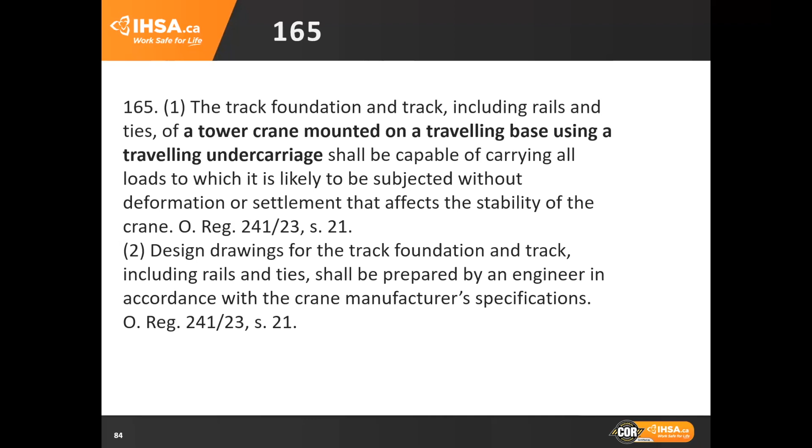Design drawings for the track foundation and track, including rails and ties, shall be prepared by an engineer in accordance with the crane manufacturer specification.

The track foundation and track, including rails and ties, shall be inspected by an engineer in accordance with the performance standards for inspecting a tower crane, as prescribed by the performance standard, before a crane is placed on the track to confirm the track foundation and the track have been installed in accordance with the design drawing.

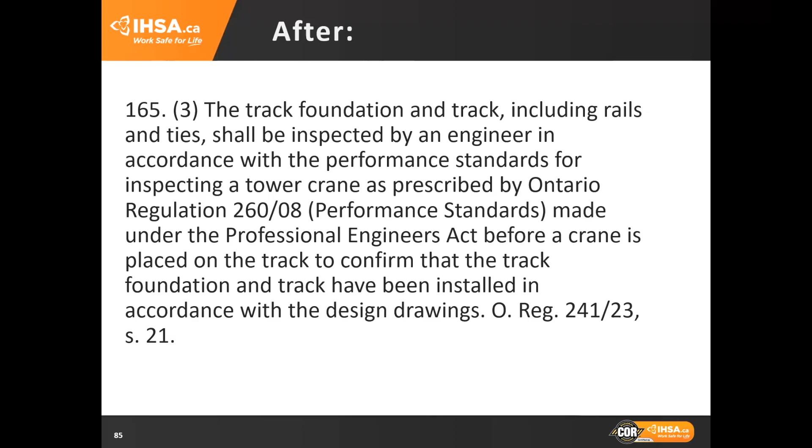The undercarriage of a tower crane mounted on a traveling base shall be fitted with rail clamps that can be firmly attached to the rails to lock the crane in position.

A tower crane mounted on a traveling base using a traveling undercarriage shall be locked in position on the rails when not in use. It shall have rail stops or bumpers that extend at least as high as the center of the undercarriage wheels and that are securely attached to the rails at both ends.

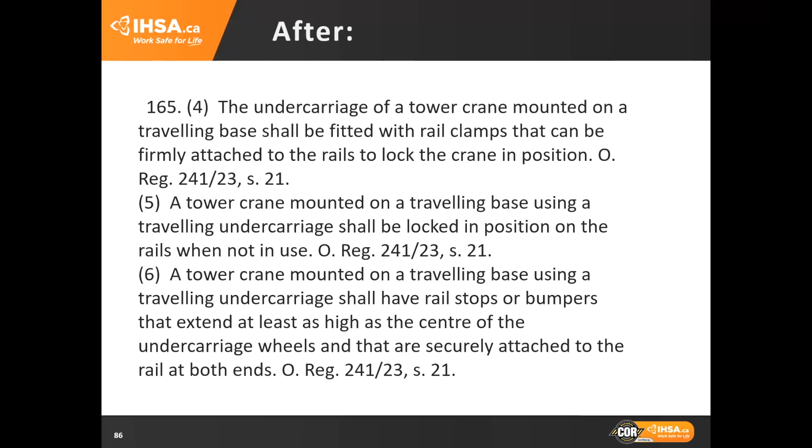168 covers wire ropes and hoisting cable requirements.

New to subsection 168 sub 1 is that synthetic rope may be used if recommended by the manufacturer. This also means the manufacturer will provide inspection requirements, because the inspection requirements listed in the regulation are for wire rope.

Subsection 2 of 168 talks about the compatibility of the wire rope for the crane, and to ensure it has kept at least 3 turns on the drum.

Subsection 3 requires the information of the wire rope that's listed in the regulation to be recorded in the crane operator's log.

Subsection 4 of 168 covers the rejection criteria for hoisting cables.

Subsection 5 allows any damage of a cable to be evaluated by a competent person to determine if it should be taken out of service.

Subsection 6 of 168 covers the rejection criteria for static cables or pendants.

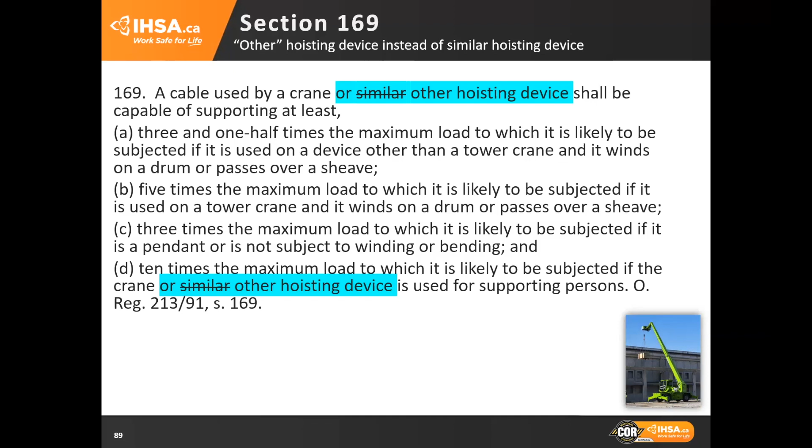The main change in section 169 is that the term 'other hoisting device' is taking the place of the term 'similar hoisting device,' which has been removed, so that this section must now be complied with by other hoisting devices as well.

Section 171 has a new part. Section 171 sub 3 has been added: all wire rope terminations used on a tower crane shall be proof tested after installation onto the wire rope in accordance with the wire rope manufacturer or termination manufacturer, but in no case more than 50% of the wire rope's nominal or minimum rated breaking strength. A permanent record of the proof testing shall be kept for the life of the termination.

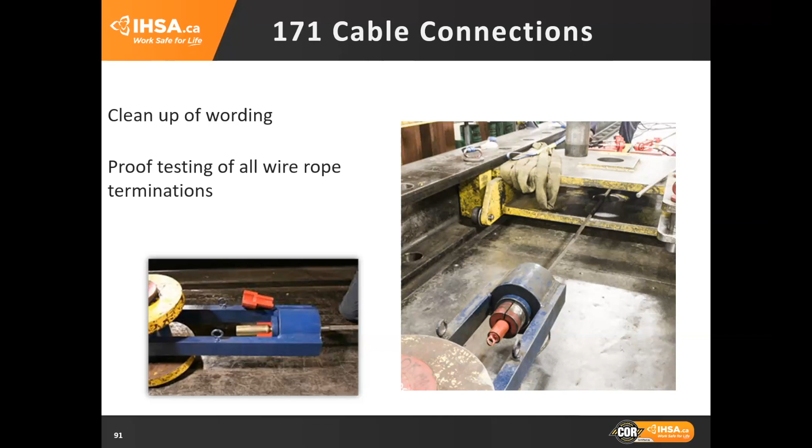Section 175 sub 2: no overhaul weight used on a cable of a crane also applies to other hoisting devices, it shall be split. For section 179, any tag lines or guide ropes used on a load also applies to other hoisting devices.

Thank you. Now I'll pass it back over to Andrew.